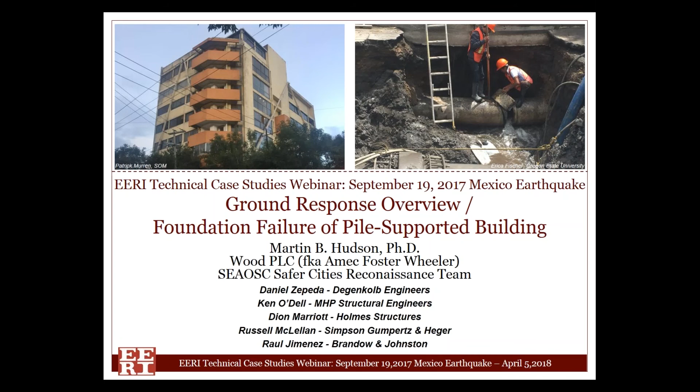Greetings everyone, this is Marty Hudson from Wood, formerly AMEC Foster Wheeler. What I'm going to be discussing today is one of the aspects we encountered as part of the SEAOSC reconnaissance team. The SEAOSC reconnaissance team was sent down as part of the Safer Cities program, and the team leader was Daniel Zepeda from Degenkolb. We also had Ken O'Dell, Dion Marriott, Russell McLellan, and Raul Jimenez, as shown there. We went down a couple of weeks after the earthquake with several different objectives.

However, today's presentation, I'm going to only be speaking about one particular structure that we looked at. Nevertheless, before I start, I'm going to give a brief seismological overview that will set the ground for this and some of the other presentations. The earthquake that occurred was magnitude 7.1, as shown on the map here.

One of the things that was interesting is that the big earthquake for Mexico City was on September 19th, but it was preceded by an even larger earthquake September 7th, but that earthquake was much farther from Mexico City. So although a smaller magnitude, the September 19th earthquake had more damage to Mexico City. Nevertheless, the preceding earthquake had raised everyone's awareness, which helped with some of the response and helped prevent loss of life. Also, interestingly enough, the morning of the September 19th earthquake, they had a drill. And so everyone had just conducted a drill a few hours earlier, which is about the ideal situation.

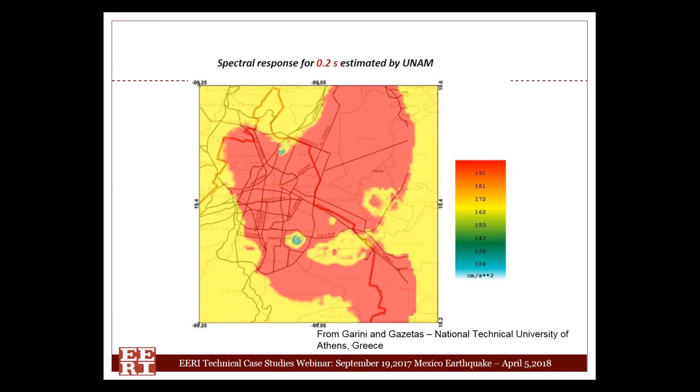If we do a comparison, this is from a computation performed by Garini and Gazetas of the National Technical University of Athens. They did a numerical evaluation, and Mexico City is represented as a clay bed with thickening clay, and we have 3 locations shown here, 25, 30, and 40 meters deep of soft clay deposits. And then that is compared to the UNAM rock site over to the side, an outcropping site. Then if you compute the response at these 3 different depths, the response spectra are shown there.

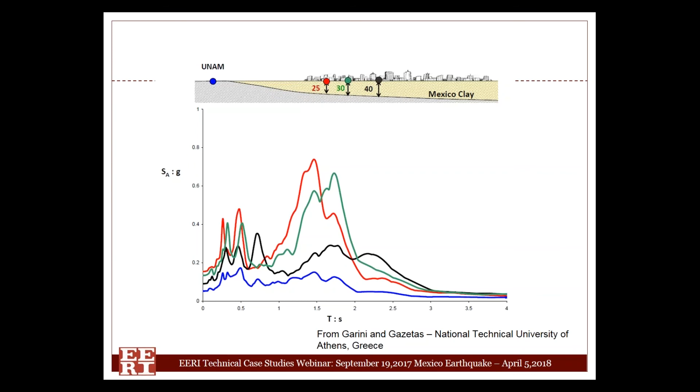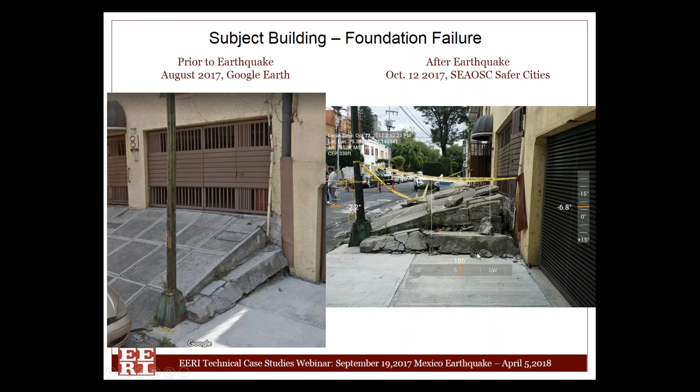So the subject building we're looking at, I'm going to show in this graph, there's two views. On the left is prior to the earthquake, courtesy of Google Street View. So on the left, you notice the big feature is this ramp from the street up to the parking garage. So there's a large offset elevation-wise between the sidewalk and the entrance to the parking. The right screen shows that same ramp after the earthquake. And you can see right offhand that there's damage to that ramp. If we do another comparison, looking straight on, the left is before the earthquake, and the ramp is easy to see.

If we zoom in, and these are both pictures after the earthquake, you can see the top of that ramp and then a step down to the garage. And that step down is approximately 1 foot high. So that indicates that there was relative vertical movement between the ramp on the exterior and the building itself. So the building was down 12 inches approximately relative to the ramp.

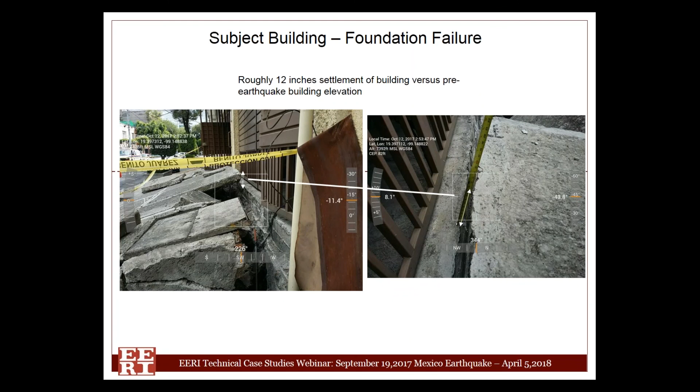So the structure itself, so you know a little bit more about it, is 6 stories. And the damage that was observed was both in the infill, and there were in-plane and out-of-plane infill failures. And there was also evidence of non-ductile concrete detailing that had associated damage with it.

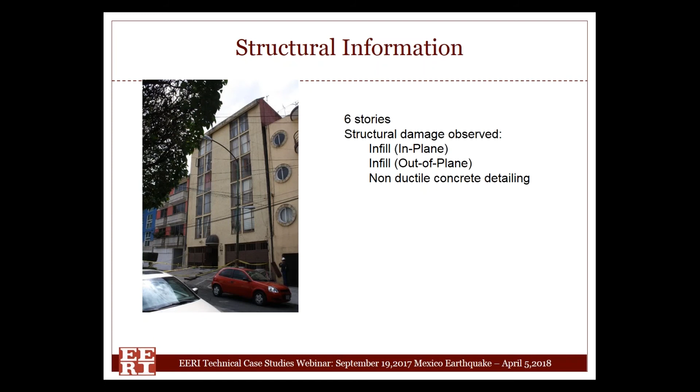One of the immediate observations besides the ramp at the front is that the building is now leaning into the adjacent building. You can see from this photograph how the gap between the subject building on the right and the red building on the left decreases as you go up to the top, till it looks like the building's resting on the building to the left at the top. The building to the left had very little damage, but this is one of the obvious things, is that we had some tilt of our structure.

So then, when we walked up into the structure and looked at the higher levels, there were some large cracks. This shows one of the cracks widening as you go up to the roof level. And the widening indicates one portion of the building leaning to the left, the other portion of the building relatively leaning to the right. So that led to that crack developing as shown.

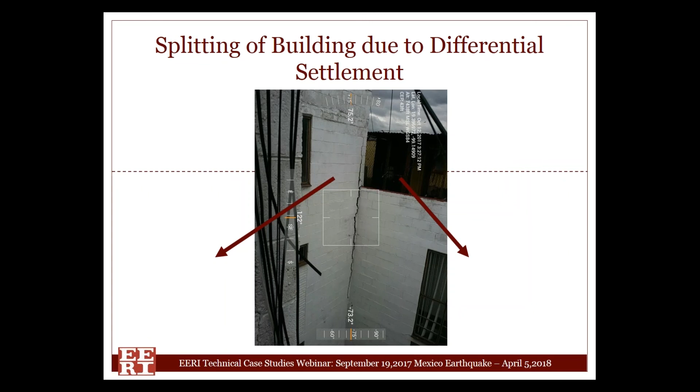As you're walking through the floors, where that crack comes up, it's very easy to see, and obviously to the residents that's a scary sight. But as I mentioned, fortunately, there was not such severe damage that the residents could not get out of the building. Nevertheless, it was a fairly large crack coming all the way up through the building. At the roof level, at the parapet, you see the extreme case of that crack with two portions of the building moving relative to one another.

So assuming this is how this particular building was originally constructed, the building was placed at ground surface, piles were placed through the clay, extending down to the rock. Then, over time, the clay is continuing to settle, irrespective of any structural forces, and that's due to groundwater withdrawal predominantly from the area, as the groundwater in the lake basin continues to be pumped for supply uses. So as that subsidence occurs, the ground surface around this building would have settled.

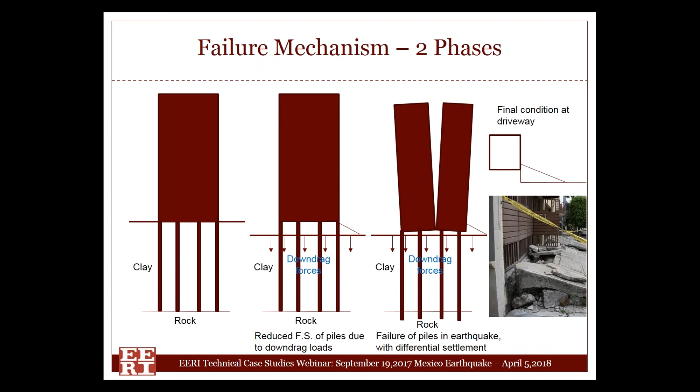So in conclusion, this was a case where we saw downdrag effects upon piles. And so it's something that definitely has to be considered in seismic environments, either due to liquefaction considerations or due to other things that cause downdrag. So those downdrag forces can be catastrophic to a building and must be considered in the design of the structure.

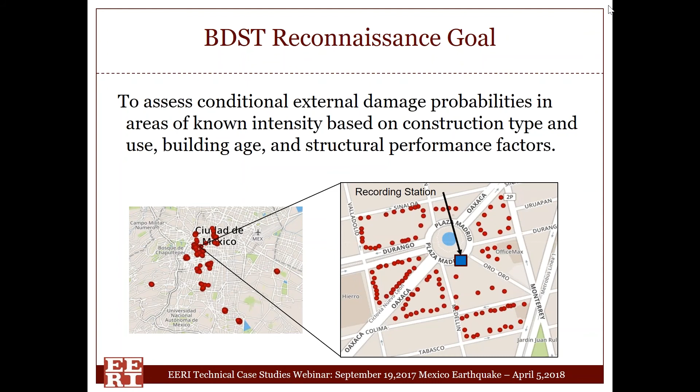The figure on the left shows a bunch of red dots, each of which indicates a building that we observed. We can zoom in on one of these areas, as shown in the figure on the right, and see that it's actually a number of red dots, each representing a building around a recording station. In this case, we observed every building within approximately 200 meters of this recording station.

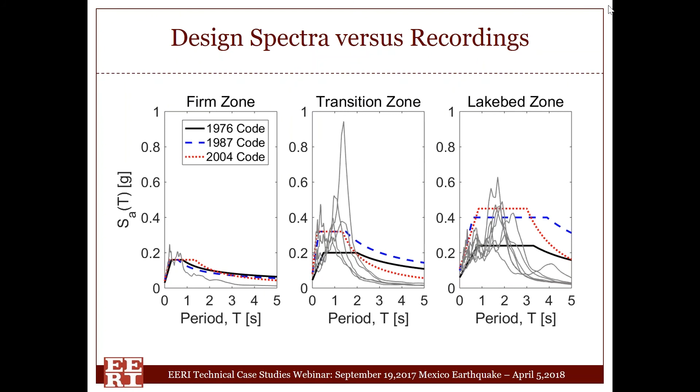And we saw that we had an assortment of spectral shapes on the previous slide. Based on this assessment, our database of observed buildings will have a variety of ground motion intensity measure values, which we assess in creating damage fragilities.

Now that we've discussed the varying ground motion intensity measures, I will explain how we noted observations at each building. We conducted external surveys only, which was partially because we would only have access to the interior of some buildings, and partially to save time.

We wanted to develop a large data set, and that can take quite a bit of time if you go into every single structure. We noted building age, construction type, use, number of stories, and very importantly, if there are any structural performance factors that might affect the behavior of the structure.

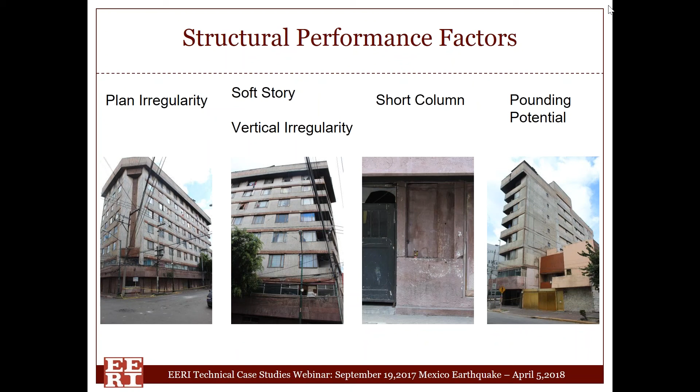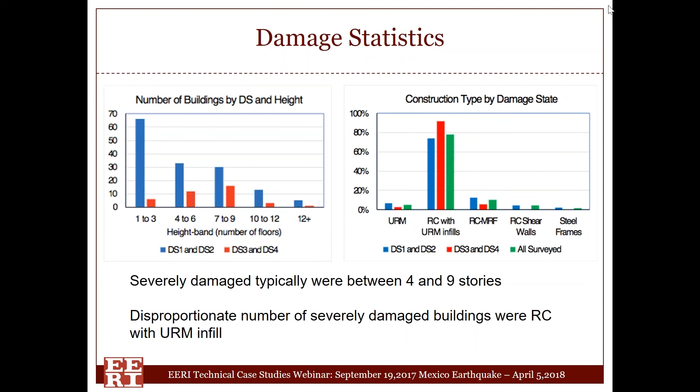If you're interested in learning more about the overall performance of structures, the BDST report will be released through EERI soon-ish, and the complete data set and metadata will be publicly available as well.

Now we'll look at a case study set of buildings that represent a nice cross-section of the typical buildings we observed. The buildings are near the SCT2 recording station, which is in the gray area between the transition zone and lakebed zone, kind of in between where that's classified.

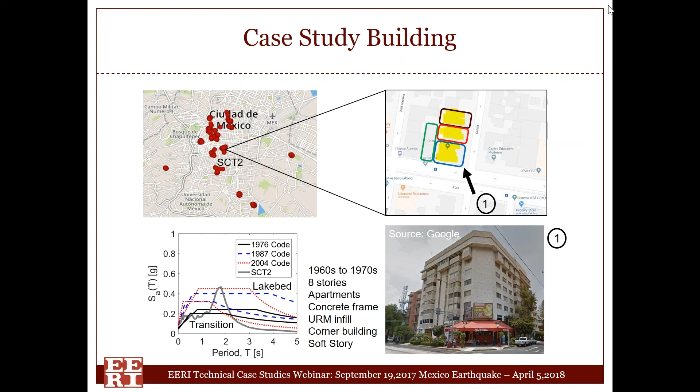In the upper right, we see the outlines of the 4 structures that we're going to talk about. And in the lower right, we see a Google Street View image of the corner building at this corner.

We'll progressively go through observed damage in the buildings, starting with the damage to the stucco facade and masonry in the building on the corner. Here we see the stucco has fallen off the structure, exposing the concrete frame and masonry infill behind it.

There appears to be a couple of pretty short concrete shear walls as well that notably are uncracked and don't appear to be damaged significantly. You can see large X cracks in the masonry in both directions, and an infill wall has fairly obviously completely collapsed, and infill has been eliminated from other bays as well.

We can go around the corner and see the adjacent building. Notice the large cracks in the concrete columns at multiple levels. These occur at the short columns in the structure, one of our structural performance factors.

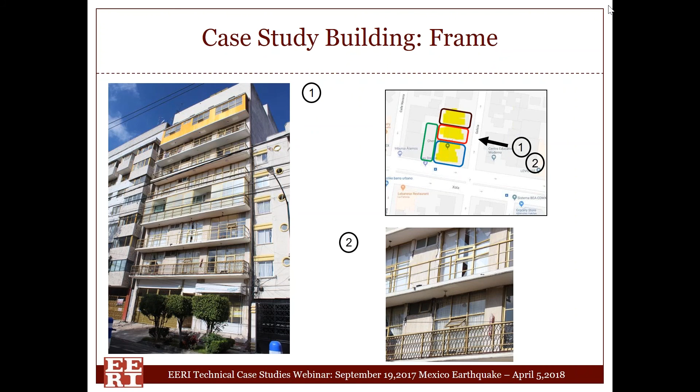We'll continue walking down the block and look at the next building in the line, which is a few stories shorter, hence has a lower period than the first 2 buildings in the row. Here we see some X cracks through the stucco, but very little has spalled and no masonry has fallen into the street.

We'll look now at the interfaces between the 4 buildings. If we go back around the corner again, in photo 1, we see that there isn't much damage and there are no signs of interaction between the building on the corner and the shorter adjacent building.

In photo 2, we see that the second building in that row, from 2 slides ago, appears to be leaning away from the building on the corner. And in photo 3, we see that that building is in fact leaning onto the shorter end building.

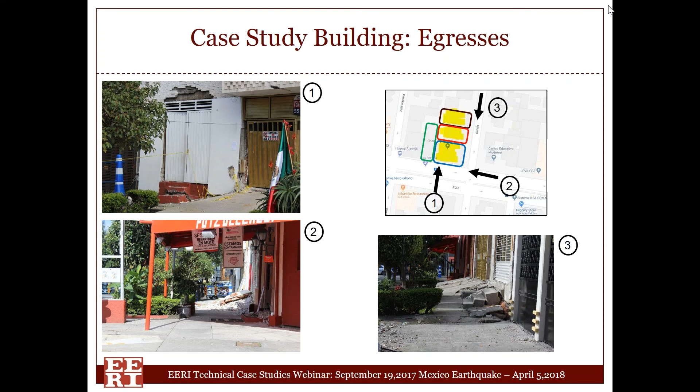On this slide, we'll look at the egresses for a few of these buildings. We can see not only bricks fallen near egresses in photo 2, but also in photos 1 and 3 that stairs in orthogonal directions have fractured and separated from the buildings, indicating probably at least a little foundation movement, though we weren't permitted to venture close enough to perform a detailed investigation.

To summarize this 4-building L-shaped block, similar buildings have very different degrees of damage. The two taller buildings likely have periods closer to the peak of the response spectrum from the recording station close to the site, while the other two buildings are shorter and away from that peak.

The potential for pounding is high. The buildings are only separated by 10 centimeters or less. However, it may have actually helped in this case. The middle building was leaning against the shorter end building at the end of the earthquake. If you numerically model rows of structures, you'll find that in some cases pounding hurts you significantly compared to no pounding. However, there are cases when pounding can help prevent collapse by providing confinement to adjacent buildings. Corner buildings can serve as fuses in these blocks, and they are particularly susceptible to damage.

As expected, we saw significant damage in the short columns because they must undergo the deformation of the story over a much shorter length, hence they experience high strains in the local areas.

The large openings are not helpful. In the building on the corner, we saw large openings with masonry infill that was not particularly well confined or attached to the frame, and they ultimately failed.

Finally, we saw these severed and damaged stairs and fallen bricks near the stairs, showing that it might not have even been safe to evacuate during the earthquake.

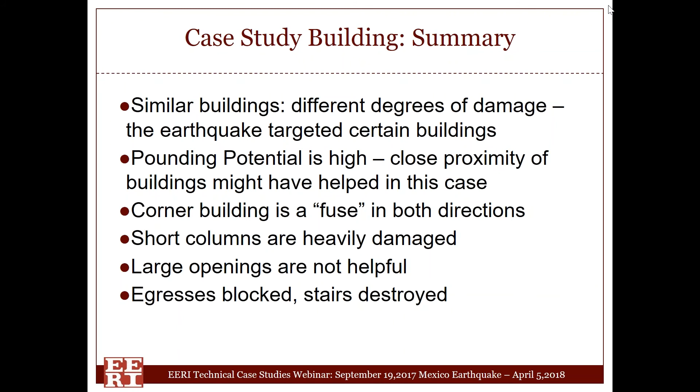Hopefully, the lessons learned from this earthquake regarding performance factors will be helpful in preventing future damage. A lot of these are fundamentally architectural issues that are solvable as long as structural engineers identify the problems during design. I'd like to acknowledge the members of my reconnaissance team and several others who assisted with data collection at various points during our reconnaissance trip. Thank you, and if there's time, I'd be happy to take questions.

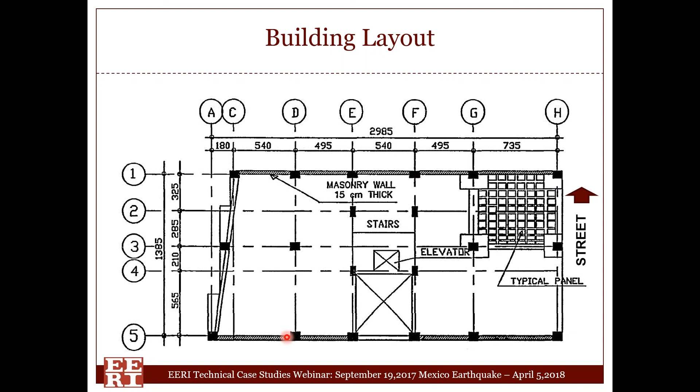This photograph shows you the layout of the building. Again, what you can observe is that the building has a fairly irregular layout. As I mentioned before, in the direction parallel to the street, you have reinforced concrete frames with waffle slabs and beams. And in the direction perpendicular to the street, you have reinforced concrete frames with waffle slabs and beams and masonry infill walls, as shown by these lines here.

Now, after the 2017 earthquake, me and some of my colleagues from Purdue University went back to this building and we surveyed it again. This time around, however, we did not go to every floor because we did not have access, but we went to the basement and the first floor. And what we saw was very, very interesting.

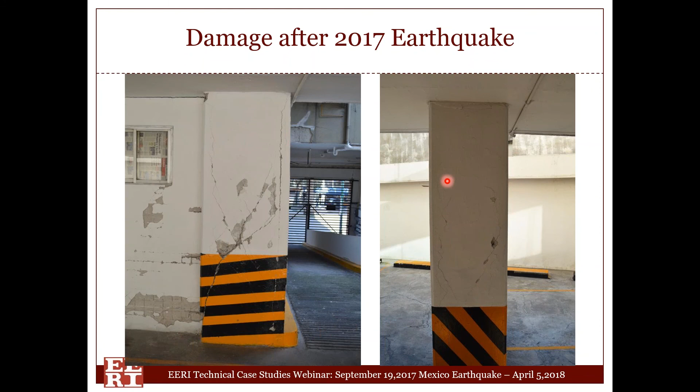In addition to the column damage, there was also some damage to the masonry. It was mainly concentrated along these 2 bays over here, as shown by the yellow box. What was interesting to note again was that there was no damage in the direction perpendicular to the street.

This photo just goes to show you what the typical masonry damage looked like after the 2017 earthquake. In the direction parallel to the street, there's quite a lot of damage to the masonry, and in the direction perpendicular to the street, we had a lot of masonry walls, and therefore we did not observe as much damage. Now, what we can clearly conclude after looking at the damage after the 85 and the 17 earthquake is that the levels of damage were quite different.

In fact, one could argue that the damage after the 2017 earthquake was a lot more than the damage we saw after the 85 earthquake.

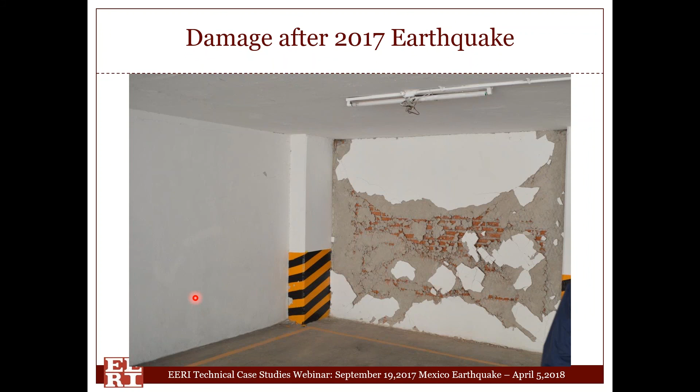So to make sense of it, we ran some numbers. We used 3 approaches. The first two involved running nonlinear dynamic analysis, using two software packages: the first was LARZ, a software developed at UIUC in the 1970s that uses a lumped plasticity model. We also used OpenSees, with a distributed plasticity model. And we used what I'd call a simplified approach, which I'll talk about more later in the presentation. Let me show you some of our results.

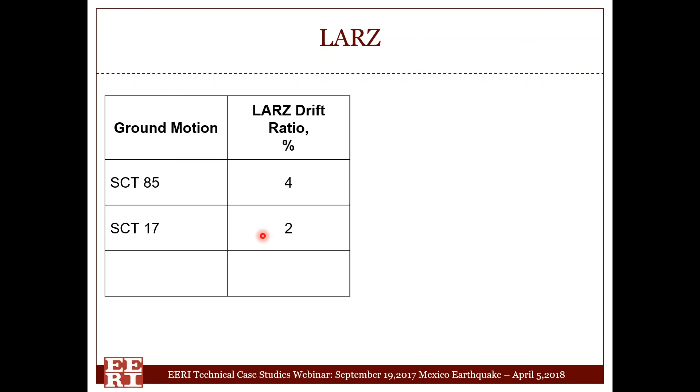After the SCT 17 earthquake, our model said we would expect a roof drift ratio of 2%. This makes a little more sense, but this value is still too high compared to the damage observed after the 17 earthquake. We ran our model using the Roma 2017 earthquake and again got a roof drift ratio suggesting the building should have seen more damage than it actually did.

Looking at results from our OpenSees model for the 85 earthquake, we got a roof drift ratio of 3%, again suggesting the damage should have been a lot more. So the OpenSees model doesn't make sense either. The SCT-17 suggested we'd see 2% drift ratios at the roof, which again doesn't match the damage we saw.

For the Roma 17 earthquake, however, the numbers start making more sense. At 1%, we might have expected a little more damage than we actually observed after the 17 earthquake, but it's better than all the other numbers on the screen.

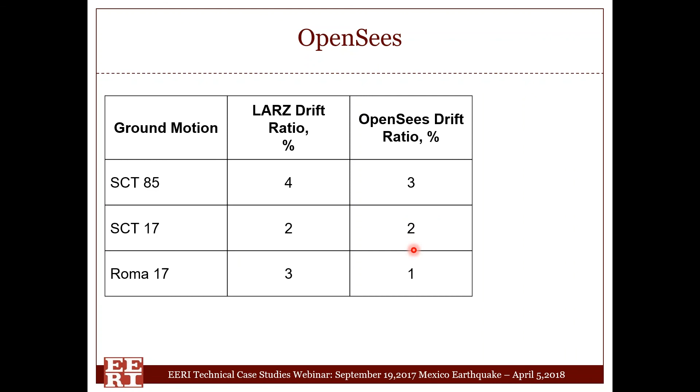Now, running nonlinear analysis can be time consuming, and it's sometimes very difficult to get right — there are a lot of parameters you need to tune. So we tried using a very simple approach to get a consistent result, not just for this building, but for other buildings in Mexico City as well.

So if we go back to our displacement spectra and calculate the initial period for the building, we get a period of 1 second. This building saw quite a bit of damage, and it's fair to assume it went into its nonlinear range of response. If you read some of the work done by Dr. Shimazaki, you can see that in the nonlinear range, you can expect as much as a 40% increase in the period of your building.

And if we use that assumption, we can say that the period of our building was 1.4 seconds during the earthquake. Now we have 3 different displacement spectra. We assumed that we could represent all of these 3 displacement spectra using a single line approximation as suggested by Dr. Lepage. And we calculated our roof drift by simply taking the spectral displacement value at a period of 1.4 seconds and projecting it to the roof by using the modal participation factor for the building, which was about 1.3.

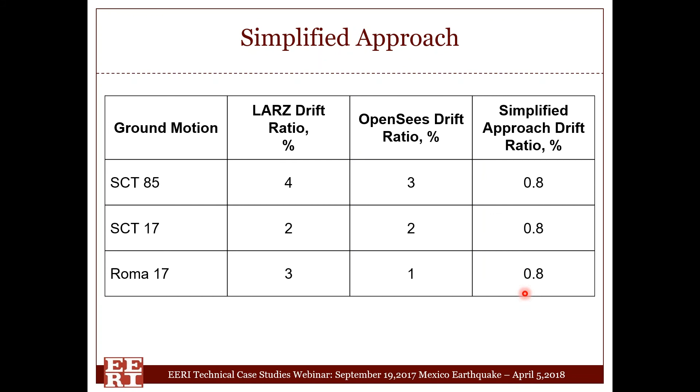So for our building, if we look at the numbers that we get using a simplified approach, we get the same numbers for all 3 ground motions. And again, this is because we're using a single displacement spectra value for all our ground motions. But the numbers seem to suggest that the damage that we saw was, in fact, probable. So for 0.8%, what you'd expect is some sort of damage in the building, but not as much as what the nonlinear analysis would suggest.

So to conclude, all I'd like to say here is that for our building, the simplified approach seems to work. The nonlinear analysis that we ran was time consuming and it was very detailed, but for some reason it did not give us a very good correlation with the damage that we observed. So the simplified approach, at least in this case, seems to work better. Now, all the data that we have for this building, including ground motions and building drawings, are available on datacenterhub.org. And I would like to invite all of you to go onto this website, get the data, look at it, and run your own analysis to see if you can make sense of what happened to this building.

Now, to end, I'd like to acknowledge the National Science Foundation and the American Concrete Institute for giving us the opportunity to go to Mexico City and survey buildings. We were able to survey over 130 buildings, and the data for all these buildings will soon be available on Data Center Hub.

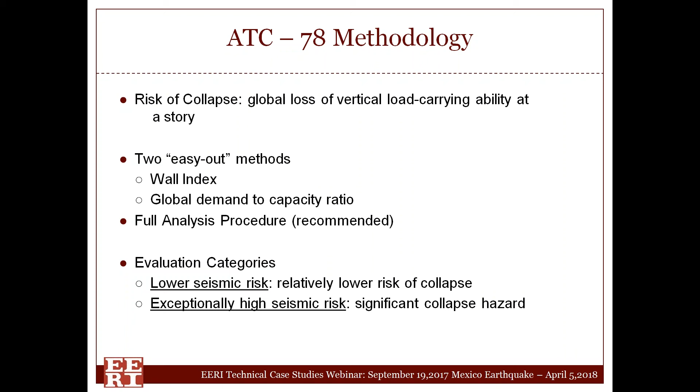And we went to Mexico City roughly 3 weeks after the earthquake. We were there for a week, and we looked at 70 different buildings. Most of these buildings we observed from street level because we couldn't get access into the building. We were able to get into 21 buildings, and we had the time and we had the manpower to monitor 5 different buildings.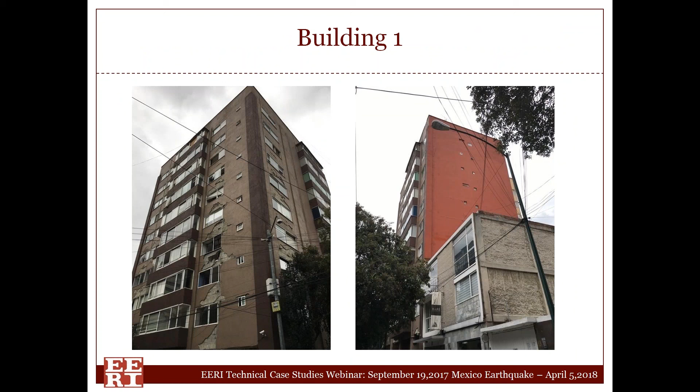And according to the building engineer that we talked to, he thinks that some cracking happened in the 1985 earthquake, and they were not discovered. And in this latest earthquake, the slab was just further weakened.

And also the walls had to allow openings for people to get into the apartments. So the walls are connected to columns on one side, but had a link beam connecting to the column on the other side. And here are some of the images we took during the trip. We saw cracking on the underside of the slab at the slab to column joint. We saw that part of the building was shored all the way up the building because of the cracking in the slab.

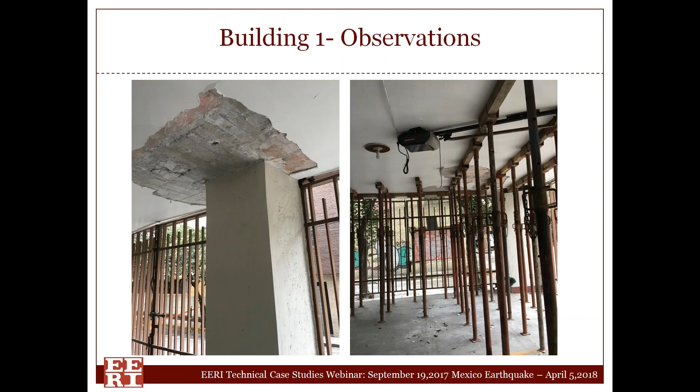And another thing we saw in this building that's typical of many of the buildings we went into is that the partition walls in the apartments are unreinforced masonry. And because the building didn't have a whole lot of walls, these unreinforced masonry walls really did a lot during the earthquake to resist the lateral forces, and they suffered a lot of damage. So these walls are generally replaced after the earthquake, but because they were there, they most likely took some demand away from the structural elements.

And then here we have some images of the link beams throughout the different levels. At the second floor, we saw there were big cracks in the link beams and some evidence of concrete falling. As we go a couple of floors up, we still saw the cracking in the link beams, but they were hairline cracks. And then at the upper half of the building, we saw that the finishes are still intact, but there are some cracking in the finishes. So the link beams at the lower floors clearly saw a lot more force and a lot more damage.

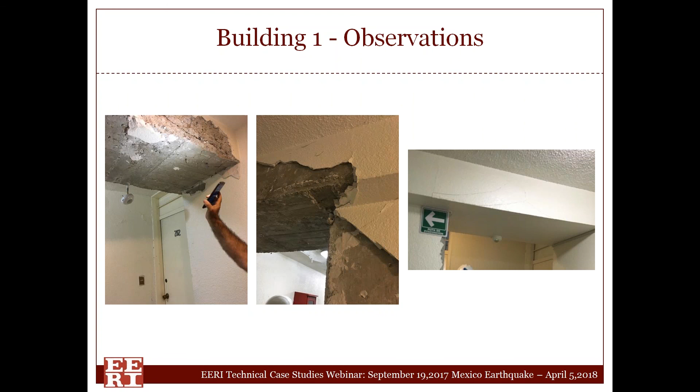So we looked at this building through the ATC 78 methodology, and we saw that according to ATC 78, this building is a lower to medium risk building, and the risk is associated with the collapse. So that's generally consistent with what we saw in the field, that the building suffered damage, but it didn't collapse. The reason that part of the slabs are near collapse is, we think, because the slab saw damage in the previous earthquake, and those damages were not repaired.

We got the building analysis model from the building engineer. We also monitored the building, so we have a set of dynamic properties for the building. So our next steps are to calibrate the dynamic readings we have with the model, and then to use the ground motions we have to see if we can predict the damage this building saw and see what are possible options of reinforcing this building.

The second building we're going to look at is a newer building. It's built in the last 10 to 15 years. This building has shear walls and steel columns, so it doesn't quite fit in the ATC 78 methodology, but we think it's interesting enough, so we did more work on this building. This is a typical floor plan of the building.

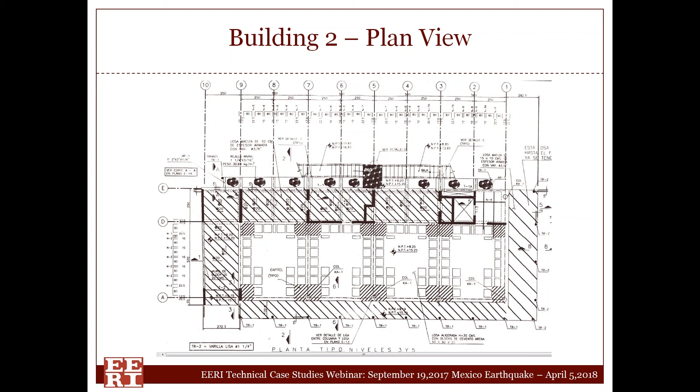We saw again that in the region of the building that's open, people put up their own partitions, and those were mostly URM, and those partition walls saw a lot of damage. When we went to see this building, it was 3 weeks after the earthquake. People were starting to put back their partition walls, and some started using light gauge material that has a sliding top connection. We think that may affect how this building behaves in the next earthquake, because the URM walls took so much of the damage during the 2017 earthquake.

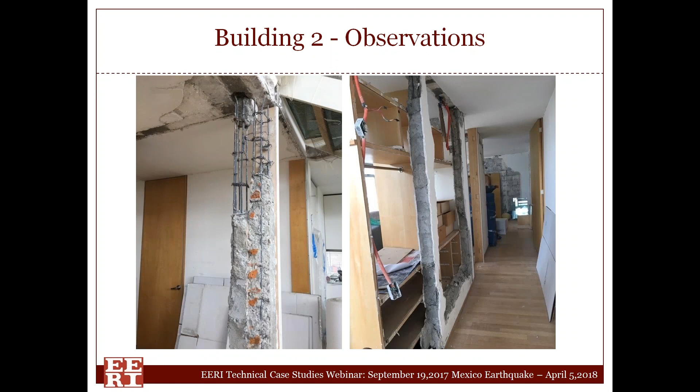These are some more photos showing that the small columns saw a lot of damage, and that the URM walls generally all had to be replaced after the earthquake. Then at the connection between the steel column and the slab, we saw some cracking on the underside of the slab, which suggests there may be incipient punching shear failure. We think this is important because it's related to the gravity load carrying capacity of the building.

So when we came back from the trip, we tried to model the capacity of this connection. We did many different models, from a simplified frame model to a full-blown 3D solid model. What we saw is pretty consistent across all the models: the joint has the capacity to accommodate about half an inch of movement, which is roughly 0.4% story drift. So if the building were to see 2% story drift based on the US design code, this joint would not have worked.

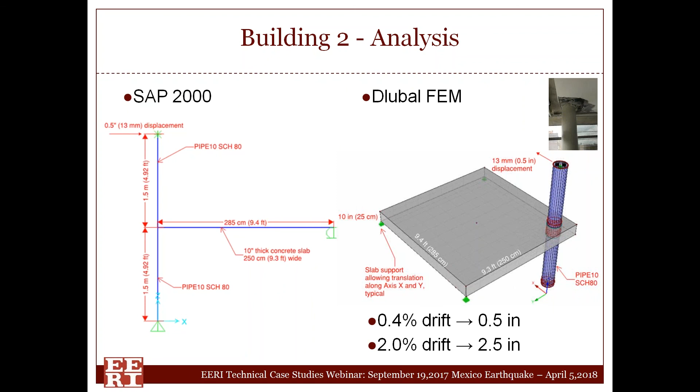And then we looked at this building in the ATC 78 framework, and we saw that ATC again said this is a lower to medium risk building. We're looking more closely at how ATC deals with the significant irregularity of the building's structural system. That's one of our next steps going forward.

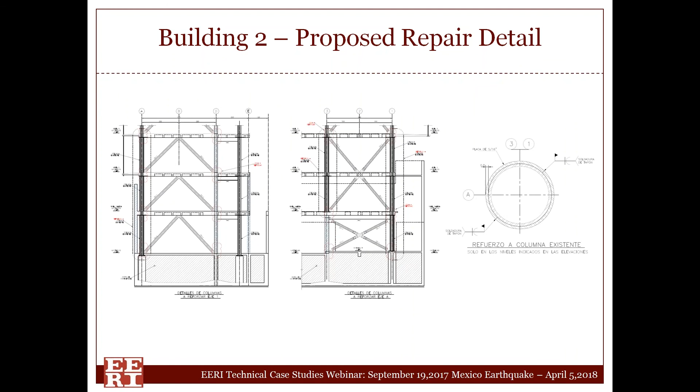In the meantime, we heard back from the building engineer that this building will be retrofitted, and that the flexible portion of the building will see some additional brace frames that will strengthen the building and try to correct this torsional irregularity. Some of the columns will be strengthened as a result, so we think this will help the building in future earthquakes.

So that was a very brief summary of the 2 building case studies that we are still working on. We just want to acknowledge all the help we've received on this trip and in our research efforts after the trip, from ATC, from UNAM, and really a group of people who were more than happy to help us and gave us a lot of information that contributed to our research and the additional work we have going forward. Thank you.

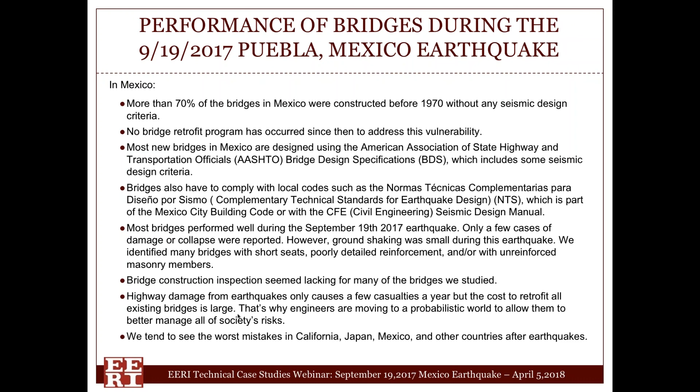In California, just like in Mexico City, we built most of our highways before 1970 with minimal seismic design. However, in our case, we had several retrofit programs after 1970 where we tried to address different vulnerabilities as we learned more about earthquakes. And of course, all our new bridges are designed using our own seismic design criteria.

These designs usually include continuity, which carries loads from vulnerable elements to much stronger connections, and also provides ductility to allow fuses to protect the structure. We also try to provide balance between parallel elements to prevent force from going into the stiffer elements and causing damage. And we try to design our structures to have a period where the forces won't be too great. Caltrans' philosophy is basically to allow damage to the ductile members to protect the bridges from collapse.

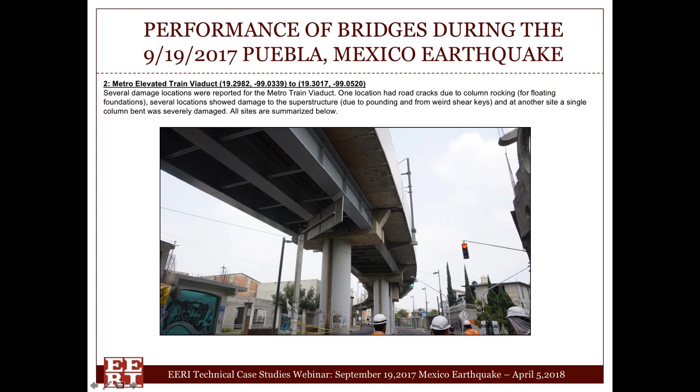On the east end of the structure, we saw several bents that rocked back and forth during the earthquake, and we generally consider that good behavior because rocking protects the substructure from damage. We also saw a lot of damage at the superstructure—in this case, the cross bracing had shear keys that went into the concrete bent cap, which moved enough during the earthquake to knock out the concrete. That's generally considered good behavior because it doesn't cause any loss of capacity of the bridge.

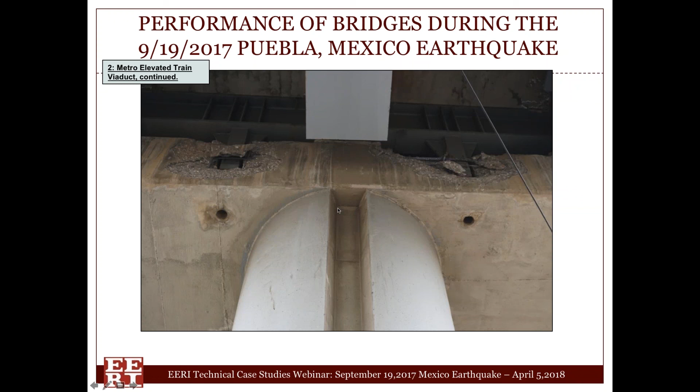You might notice these columns have a slot in them, probably meant to hold drainage pipes, but we noticed that construction inspection was often poor, so these final touches like drainage sometimes weren't completed. Walking along the bridge, we noticed there was enough shaking to cause spalling of the bent cap as these simply supported spans knocked into it.

So this bridge had some pretty severe damage due to lack of ductility of the columns, maybe due to poor construction inspection while this bridge was being built.

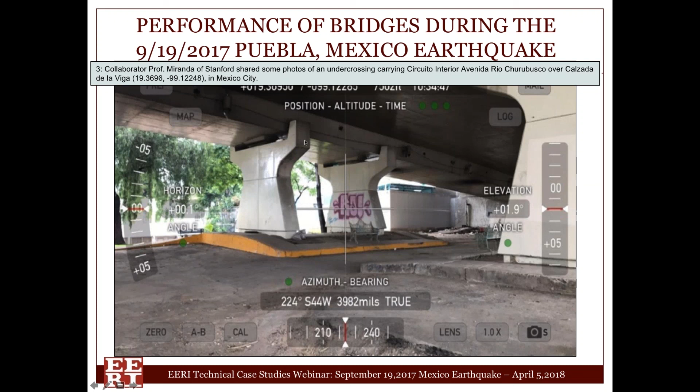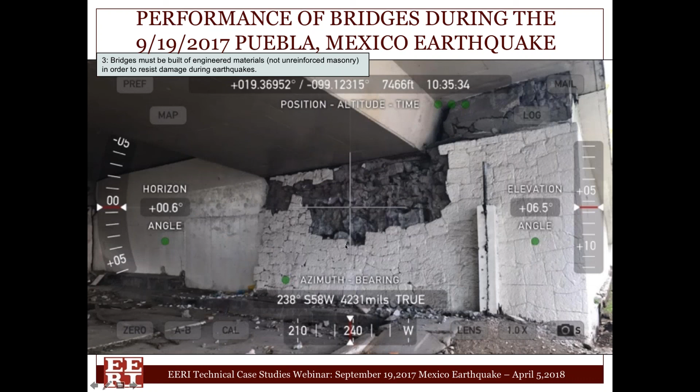Then the third bridge we came to was a pair of 5-span undercrossings with pier walls, drop bent caps, and masonry abutments. Like we've seen before, pier walls were very strong, so they rocked during the earthquake. The foundation rocked, and then the unreinforced masonry abutments and the superstructure banged against the shear keys, causing a lot of spalling, fortunately not enough to cause any serious damage. You can see the bridge is a 5-span bridge with a very long, heavy main span, which overloaded these very small substructures, but fortunately not enough to cause serious damage.

Then the next bridge we looked at was the viaduct Tlalpan. Like I mentioned, these viaducts are very popular in Mexico City because they usually provide a toll road for people in a hurry to get through the city, and they increase the capacity on these highways just by building these columns in the median.

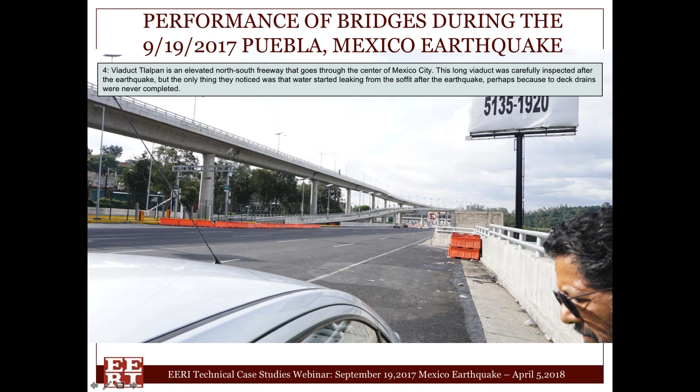We stopped and talked to the highway patrol and asked them if they found any damage on these bridges, and they said no, the viaduct was thoroughly inspected and no damage was found. However, they did say that after the earthquake, they found a lot of water draining out of the expansion joints and weep holes on the structure. So I assumed that probably a lot of debris had accumulated inside the drainage of this viaduct — you can see again there was no drainage pipe put over here — and during the earthquake, a lot of that debris probably got shaken loose and allowed the water to finally drain off the viaduct.

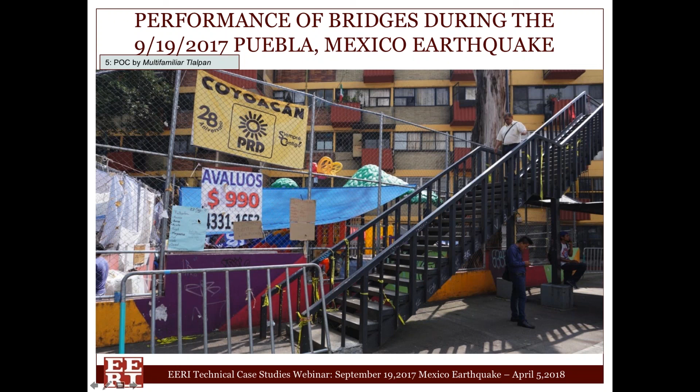The next structure we saw was a pedestrian overcrossing at Multifamiliar Tlalpan. This was right next to where an apartment building collapsed during the earthquake, and a tent city had been built. This pedestrian overcrossing had been damaged during the earthquake but fortunately was immediately repaired, which was good since it was heavily used by all the people that needed it after the earthquake. We inspected it but couldn't find any damage — we just saw the sign saying that it had been damaged.

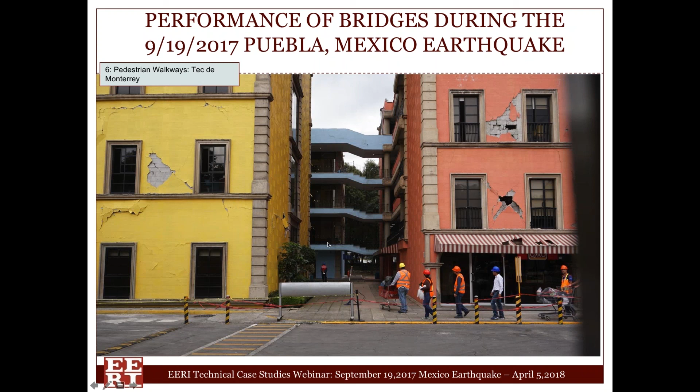But we saw much worse damage at the Monterrey Institute of Technology in Mexico City. You can see that the buildings were very damaged. They also provided bridges between all the buildings, between the floors. In this case, the bridges weren't damaged, but behind the buildings, there were some bridges that collapsed during the earthquake, which unfortunately killed 5 students and injured about 20 students.

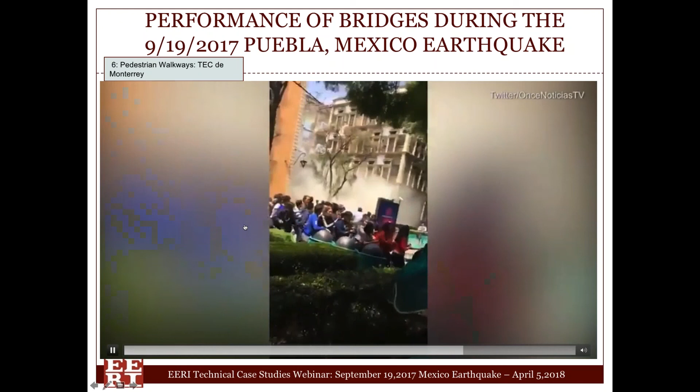And so when we arrived six days afterwards, the students were putting up memorials to the victims of the earthquake. Continuity is so important, and also designing - if the structures are unbalanced, then you have to design the connections particularly well to prevent collapse.

Okay, now we're going to leave Mexico City and look at structures that were damaged in the state of Morelos. The first bridge is Puente Xiotepec, a one-span river crossing. The shaking was smaller in Morelos, probably around 0.1 to 0.15 G spectral acceleration, which engineered structures like bridges shouldn't be affected by at this low ground shaking.

However, the state of Morelos had weaker soil - in this case, loosely consolidated silt. The silt allowed the two abutments to move back and forth during the earthquake, which allowed the one-span superstructure to move off the abutment seats and collapse.

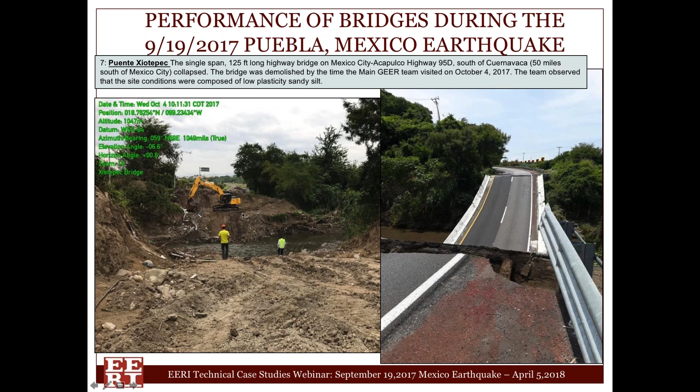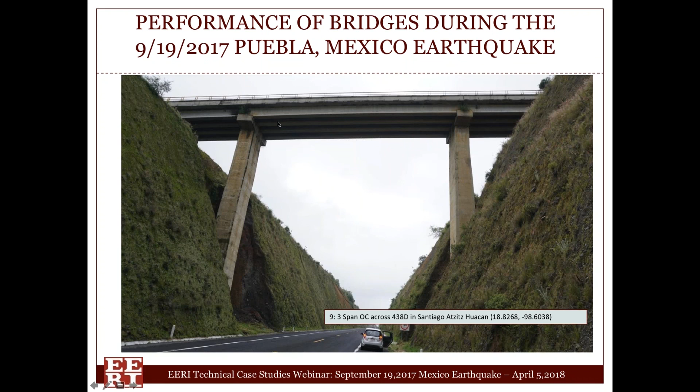Another bridge on the way to Mexico City in Morelos State, a tall three-span high girder bridge, didn't really suffer any damage, but you can see this is in a high cut area, and the cut around one of the piers sloughed off during the earthquake.

The final bridge we looked at, similar to this one, is in Puebla State, close to the epicenter, in the town of San Juan Pilcaya, which was mostly adobe construction that had a lot of damage during the earthquake. This bridge, similar to the last one we looked at, was closed after the earthquake.

What happened was the connection between the columns and the slab superstructure came apart during the earthquake, and for safety's sake, they closed the bridge. So this is another case where continuity is needed between the substructure and superstructure to prevent damage.

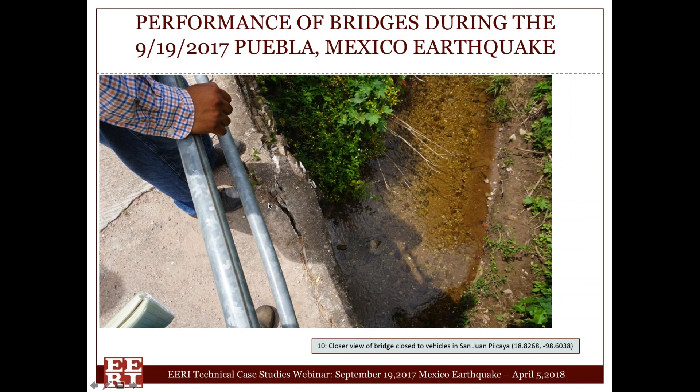So that's all the bridge damage that I was able to find during the earthquake. Most of the damage was either due to lack of continuity between members, or a lack of confinement due to poor detailing or the use of unengineered material like unreinforced masonry, and also due to lack of balance, such as between buildings that supported bridges.

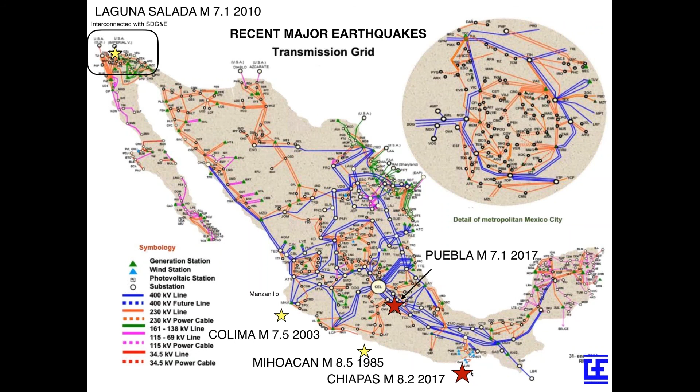In the September 7 earthquake, the level of shaking along the ocean substations was on the order of half a G, strong shaking. They did some seismic design for newer equipment at these substations. However, there was a lot of damage to older equipment which had not been seismically retrofitted. The net result was about 126 million pesos worth of damage at those substations.

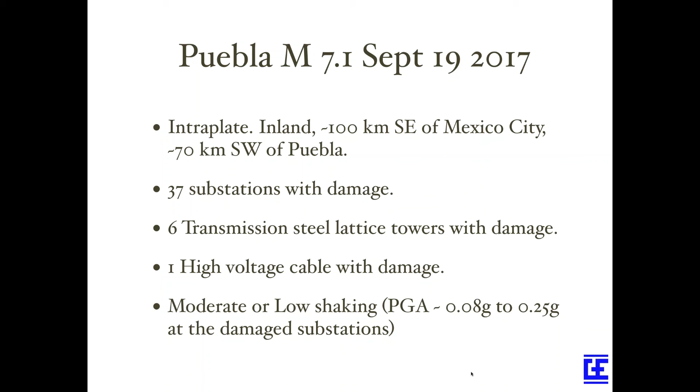The Puebla earthquake is far more interesting because it affects a much larger population. It's an intraplate event, about 100 kilometers southeast of Mexico City. 37 substations had damage, 6 transmission lattice towers had damage, and buried cable had damage. Most of the substations had pretty low levels of shaking, 0.08 G to 0.25 G.

The peak power outages were about 4.8 million people, about a third of all the CFE customers, lost power initially. By the 23rd of September, 4 days after the earthquake, 99% was restored. This did not come without a big effort - over 3,000 people were involved in the restoration effort.

But what are the causes of the damage, and what can be done about it? We're going to talk about that next.

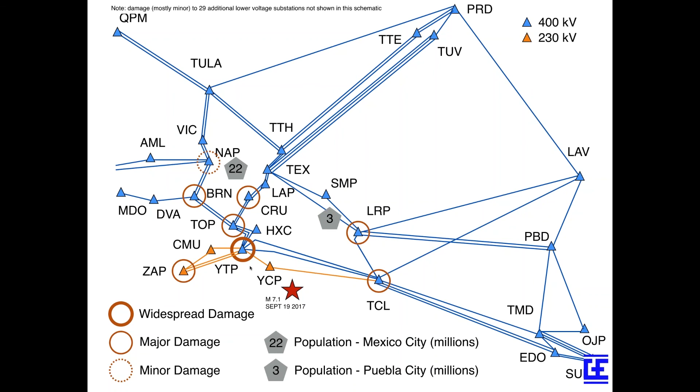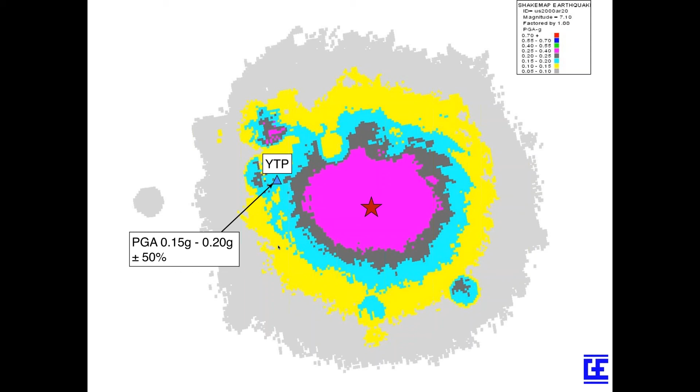The level of shaking here, using shake maps - much of this is not based upon instrumental data, it's based upon 'did you feel it,' so it's basically an inversion of Mercalli intensity. The YTP substation is located around 0.15 G shaking, not real strong shaking, maybe 0.2 G. However, there's lots of uncertainty and no instrument at the site, so we have to say it's plus or minus 50%.

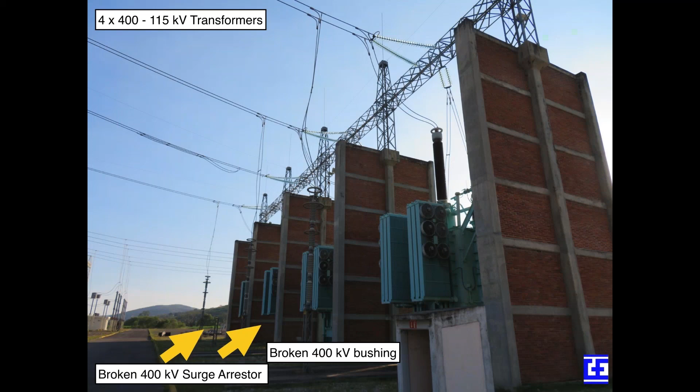These are what bushings look like. When they break, we're out of business. Fortunately, there was an extra transformer here, so they were able to rewire the transformers, 3 remaining ones, to make a circuit, which is one reason the power outages were not very long. However, this is in the boneyard of broken debris for broken aspects.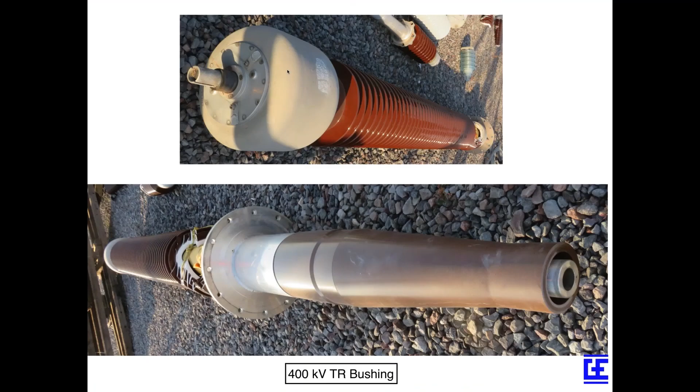It's well recognized. The low voltage bushings here, which are attached to the bus work, we're using rigid bus. When these transformers move side to side 5 inches or 7 inches, you are occasionally going to break the bus work or you break the bushing. Either way, you have an outage. Not a good design. Here we're showing electrical standoffs, a long known problem with surge arrestors. This is likely what happened in the surge arrestor that failed at 400 kV.

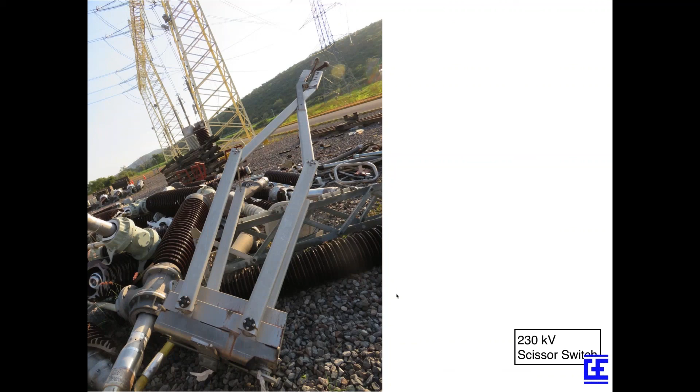These are the replacement, I'll call them candlestick circuit breakers. These are 230 kVs. 3 out of 6 of them collapsed. Again, we don't consider this to be a particularly good design, and you'll see the issues here. No slack in the cables. Not a good seismic design.

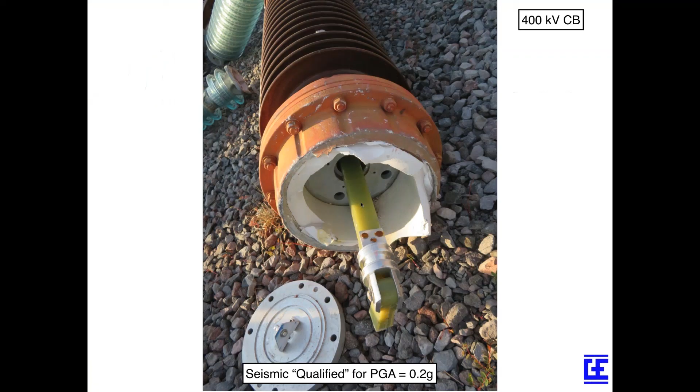In the newer part of the yard, there were 12 circuit breakers. They all work fine. However, we go to the boneyard, there's a lot of damage at the yard, and we inspect damage. We start seeing things like this. This is on a circuit breaker which was quote unquote seismically qualified for PGA equals 0.2 G. And we can see that the fact it's in the boneyard here, broken, suggests that the qualification wasn't quite up to snuff.

There is much damage in the yard, surge arresters, wave traps. These are current transformers. The dark ones, they're sort of dark brown, are the older versions, and the light sort of gray is the newer ones. Seems to have no impact in terms of old design and new design. They all end up in the boneyard.

The reason that they failed here is, as I'm showing, my arrow is highlighting a cast aluminum fitting here, which is snapped off in the earthquake. This is due to limited slack that we highlighted before. As the components move differentially, they impart big snapping forces when the cables get tight, and this just snaps off aluminum. Those who think that aluminum is ductile, it is not ductile when developed like this.

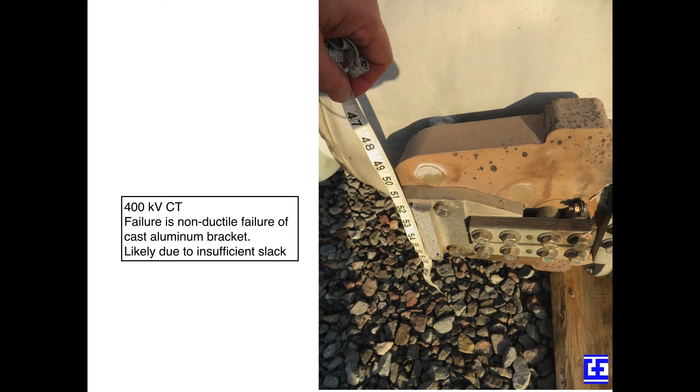Here is another situation before the damage. Here showing a little angle that attaches the wires. This is undamaged, but this is another similar unit that is damaged. You can see the cast aluminum fitting here is broken off. And here's my hand replacing the part that's broken off. So this is caused by cable snapping forces. If we follow IEEE 693 or 1527, we take care of the problem, no issue.

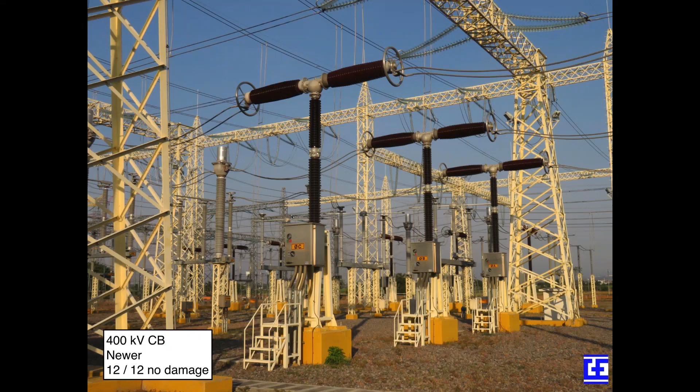These newer circuit breakers did not fail, 12 of them. So we say inertially they're pretty good for 0.15 G or so. However, this is the yard here that had a lot of damage, and this is a photo taken about a month after the earthquake, after replacements have been in place. All the circuit breakers where the arrows are highlighting, they all collapsed. That's half the yard that went. These are the seismically qualified 0.2 G breakers that are still standing in service. However, some did not quite make it, as we've seen here.

This is the control building. It's a non-ductile concrete frame building with little stiff short columns. Everybody would recognize they're not good seismic design. However, with 0.15 G at the site, we could not see a scratch to the building itself. So the building was fine, probably because it was a low level of shaking.

The battery room here, these are station batteries. One of the battery units here collapsed. The rest of them were removed afterwards. It is, I would say, shocking to see a battery rack with no seismic design details in this day and age.

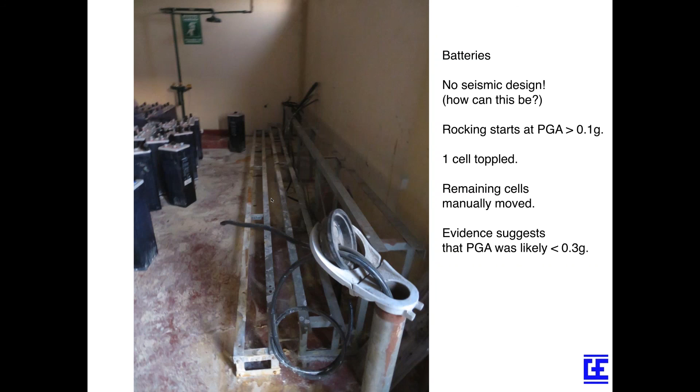And this is unfortunate, but this is what causes power outages, and I would say that CFE has not taken good care of seismic design detailing for these kinds of issues, at least near Mexico City, where only 25 million people live. Although the seismic hazard there is pretty small, the cost to mitigate this is next to nothing and should be done. So let's talk a little bit about the water system.

And I would call Mexico City, in terms of the entire world, the king of broken, segmented, large diameter concrete pipes. These are our large diameter concrete pipes. We have a lot of them in California. They can fail, and they do fail in earthquakes, and this is an issue. It's certainly an issue in Mexico City, and it is an issue in California. Mexico City is no stranger to earthquakes, and there's been a lot of earthquakes in Mexico City and lots of damage to the water system in Mexico City.

In this particular earthquake on September 19th, we had about 1,500 leaks in the system. And I want to highlight, first off, what happened to a 48-inch diameter concrete segmented pipe. It suffered 26 leaks. I would say many of these leaks were, I would call them, failures over a length of 22 kilometers. And the question is, why did this aqueduct have all this damage? And the answer was, it is not related to permanent ground deformations. It is related to peak ground velocities, but mostly due to basin effects. And I'm going to talk a little bit about that.

Mike O'Rourke, Tom O'Rourke, and others in the water business, seismic design issues have a lot of debate on this topic. And this earthquake pretty much settles it, that basin effects are very important when they occur. In our design code, that's the ALA 2005, we recommend design of the joints of 7 times ground velocity V divided by wave propagation speed C, and not V upon C. We use 7 because we recognize there's uncertainties in the joint stiffnesses, and the joints can't just open up 1/16 of an inch. It's going to open up more.

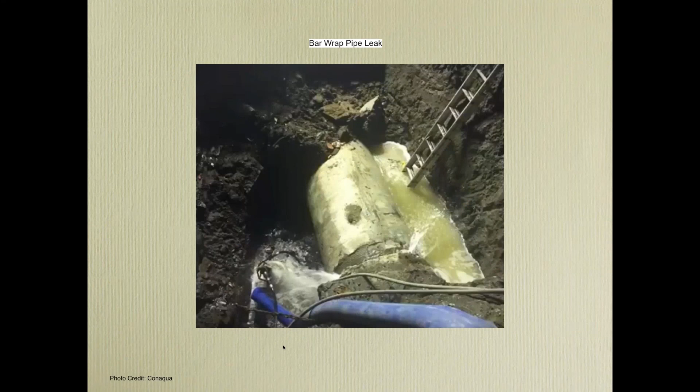So some photos here of broken large diameter pipes. Clearly, they're big diameter, and when they leak, they cause a lot of issues. And these pipes don't look any different in many ways to some of the pipes we have here in California. And the repair efforts are substantial and they're time-consuming to do. If you have too much damage, they say throw away the pipe and build a new one, which is what we're showing in here. And occasionally they'll use some pieces of steel. So this is very common design. We'll see it in California, we see it in Mexico.

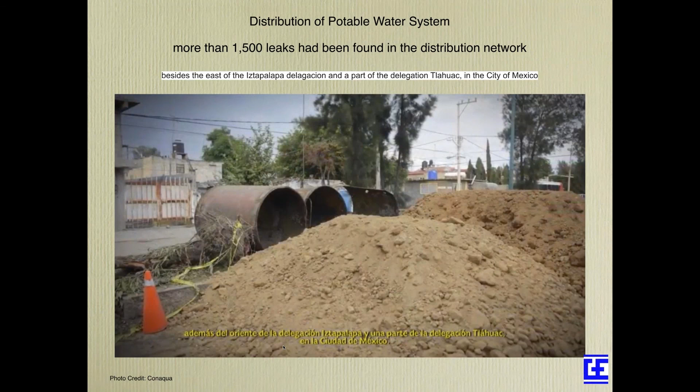The question is, why did we have 22 failures over 26 kilometers? Well, we went back and tried to look at how these pipes were originally designed, and it looks like it's the so-called lock joint pipe circa 1900 design. And this is the design detail of that type of pipe. If we zoom in here at the joinery, we see a gasket, 2 pieces of pipe are pushed together and the gasket sits. And it has about a joint capacity of about 1 inch opening before it opens up and starts to leak.

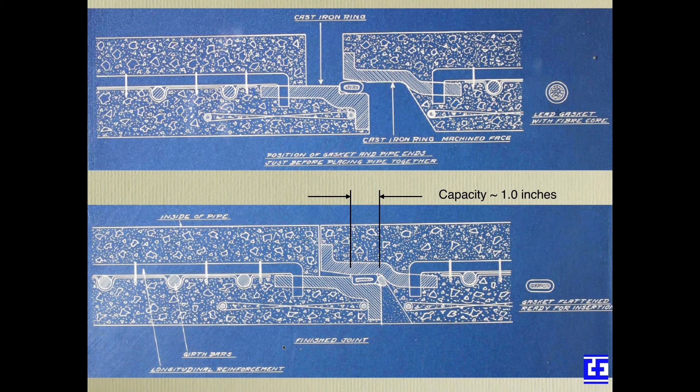So what causes the joints to open up, or worse, when they open up, they come back together and they pound and we spall the concrete, and then we have a huge problem in terms of a leak that's not repairable easily. These are the kinds of pipes when they're being constructed. So why do these segmented pipes break? Well, historically, we assume vertically propagating shear waves, but we're now clear that in Mexico City and in basins in California, surface waves or Rayleigh waves may rule and may cause more damage.

Basin waves or surface waves are slow moving. We are recognizing that they occur. They're caused by pulses in earthquakes, directivity issues, and basin effects. And including in California, we have basins called Los Angeles and Pasadena, and other basins like San Jose between mountain ranges. When the high velocity shaking hits the mountains, they bounce off as slow moving surface waves, and these slow moving surface waves are going to damage segmented pipe.

Here's a structural nonlinear model. We looked at this. If we assume case A of a pipeline, here we have a pipe that's about 12,000 feet long. We assume vertically propagating shear waves, which has been done historically, and we find that we project that the joint should open 0 inches, and the pipe moment is 1,260 kip inches, which is trivial for these types of pipes.

But case B, if we have one single cracked joint in this whole pipe, run the same earthquake, but assume it comes in as an R wave, then the pipe moment increases somewhat. The joint forces go to 2,000 kips, which is enough to crush the joint when it comes back together again from spalling. And the joint opening here is 1.35 inches, which is enough to cause leakage because these joints are only good for about 1 inch. So clearly, the type of wave, S versus R, is the key.

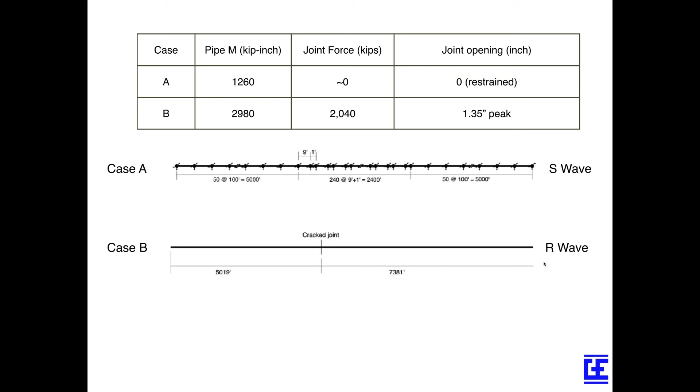So observations: the joints will open on these concrete segmented pipes, including all our PCCP pipes in California, if we have a single pre-cracked joint. Secondly, they'll open up if there's slow moving traveling waves. These are going to occur if we are in basins. Third, the joint will open up if there's a major stiffness change, like an elbow or a vault. So the bottom line is basin effects, pulses, directivity all make this a much worse situation.

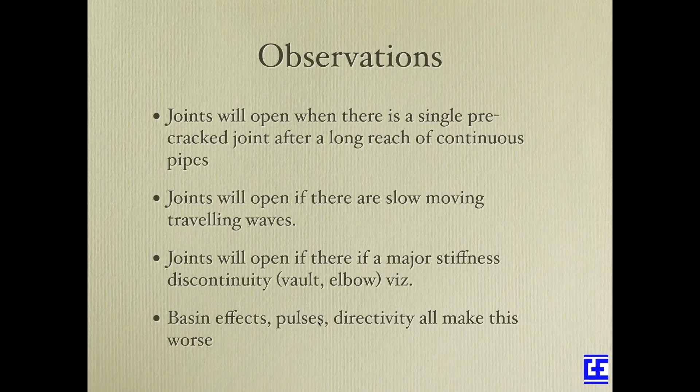What to do about this for big pipes? First, don't use segmented concrete pipe for critical pipelines. It solves the problem. Second, use chained ductile iron pipe like Kubota or US Pipe. That solves the problem. Third, use continuous pipe like welded steel or high density polyethylene. That solves the issue. Or fourth, use long throw joints, which has been done occasionally, but not often in California. All these are approaches to solve the problem.

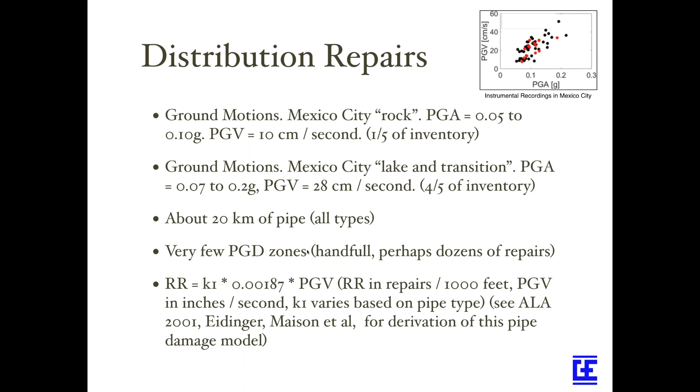With respect to the distribution system in Mexico City, the level of shaking varied in Mexico City, as the prior presentations highlighted. The shaking in the transition and lake zones was much stronger than in the rock or the hilly zones. There's about 20,000 kilometers, not 20 kilometers, 20,000 kilometers of pipe in Mexico City. There were very few permanent ground deformation zones, a handful throughout the city. And if we use the ALA models, we forecast 1,185 pipe repairs.

The actual is 1,500. The fact is that Mexico City has a lot of subsidence, and this may have pre-cracked a lot of these pipes, and may be one reason that we are getting a little bit low on our estimates. So bottom line is, as a first order estimate, the ALA models are pretty good, 1,185 versus 1,500, or we can adjust them for Mexico City with a factor K of 1.27 to reflect the special situation in Mexico City with the long-term subsidence issues.